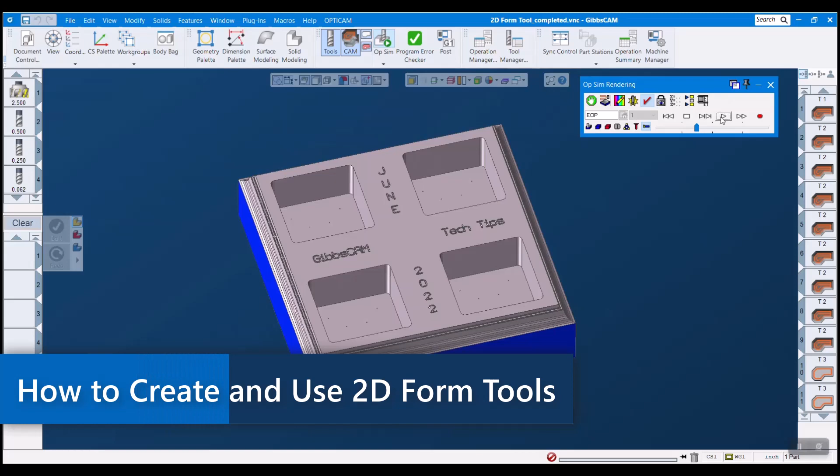Form tools are sometimes a necessary part of programming when you are using unconventional tools. Recent enhancements made to GibbsCAM make creating, using, and simulating these tools better than ever. Today, I'm going to show you how to import a DXF, make a 2D form tool from it, and use it in a contour operation.

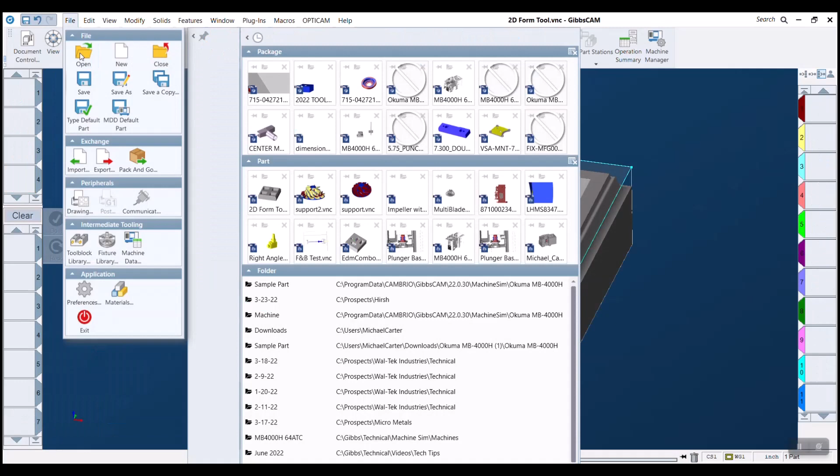So the first thing we want to do is go to File, Import. I want to select my DXF. DXFs are drawing file formats that only use two dimensions, X and Y. You can typically download these from the manufacturer's website for precisely this reason.

And so once I import this here, it actually comes in gray. And the reason for that is it's making a work group for our DXF layer. You can see that when I open my work group menu here, and when I select a DXF work group, it turns blue here, right?

So there are three rules that your tool geometry needs to follow for 2D form tool creation to work. The first rule is that it needs to be in the XY plane. I think when you import things from drawing files, they typically come in the XY plane, so this isn't too much of an issue. However, it is still necessary for this to work.

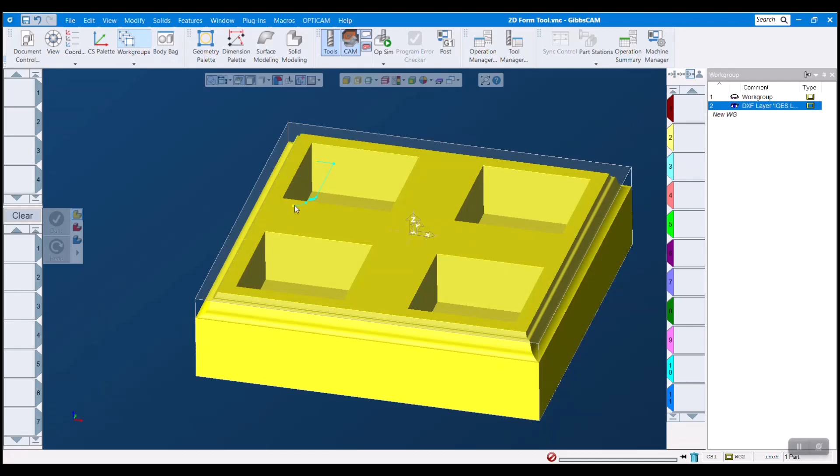The second rule is the tip of our tool here must be at 0, 0, 0 of our original coordinate system. So how we do that is we just double click this to chain select it, and we can go to Modify, Absolute Translate, and I'm going to click in here and I'm going to hold down Alt and Shift on my keyboard. So when I do that, it turns to a square, and what we're doing is we're grabbing values from the model to put into this dialog box.

So Alt and Shift on the tip of our tool, and it fills in the XYZ coordinates of our tool, right? And I want to move it to 0, 0, 0. So I hit do it, and we see that it jumps right over. So now I still have my geometry highlighted.

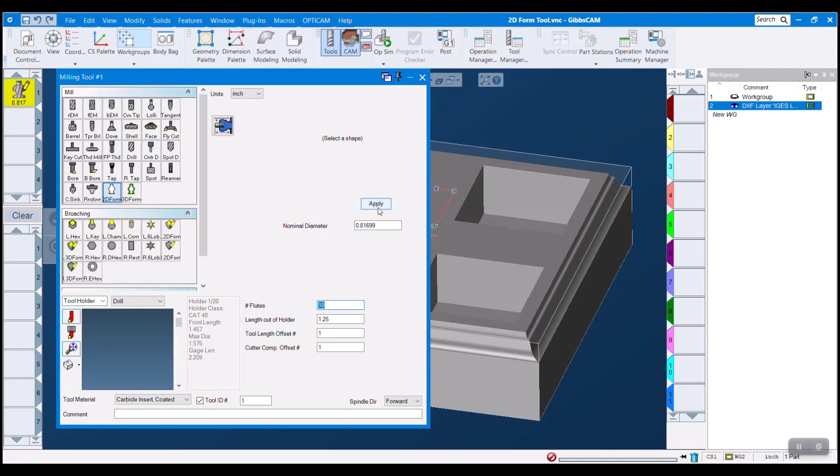We can double click on a blank tool tile, and 2D form tool is down here at the bottom. And then I want to come over here and hit apply, and you'll see it load in here, not only up here, but down here. We can select a holder. We can tell it how far out of the holder it is, all the things we can do with normal tools. So that's all standard behavior. So that's how we create our 2D form tool.

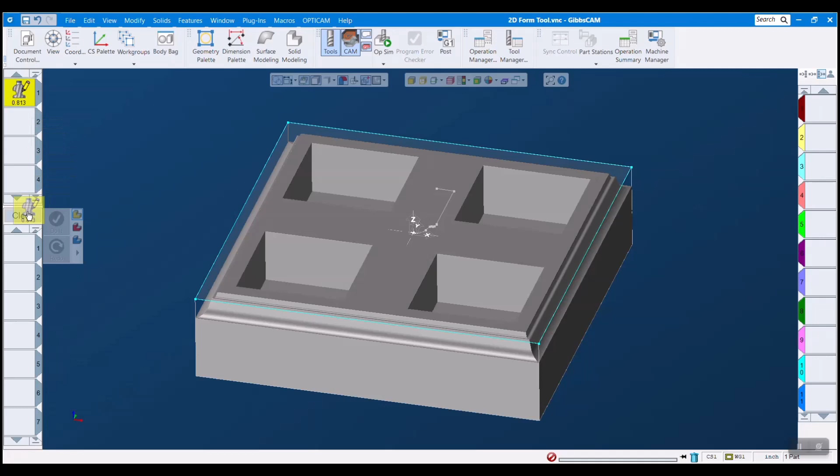Let's make a quick operation with it. So I'm going to jump off of that work group here back to our original work group and close out that menu. Let's drag this down and make a contour. And I'm not going to dwell too much on this. I just want you to see our tool in action.

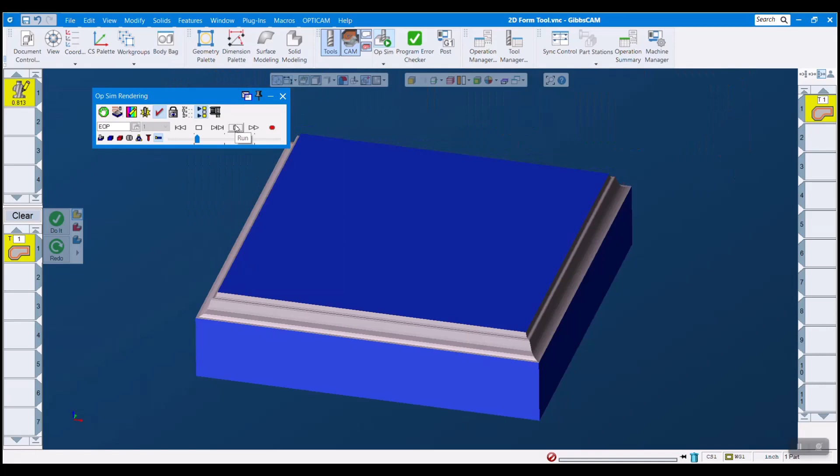Start off our part. So recent enhancements to simulation allow GibbsCAM to accurately simulate all kinds of form tools now, even in multitask machining and 5-axis machining environments. So that really takes our form tools up a notch here in terms of usability, viability.

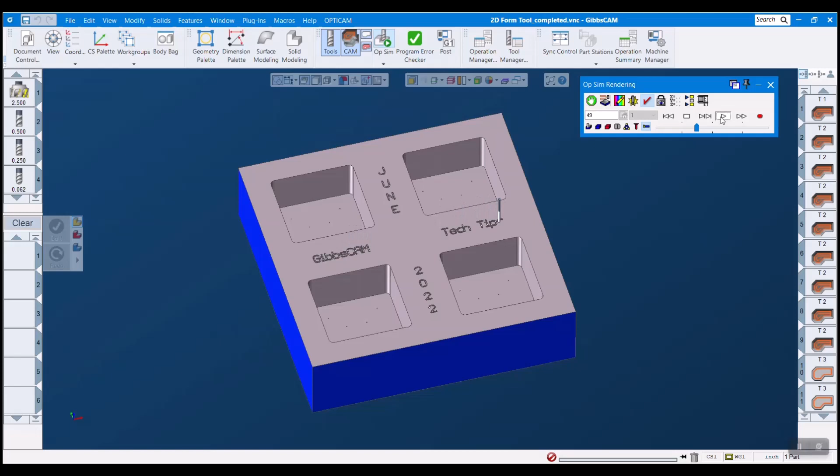2D form tools can sometimes be powerful allies when trying to machine difficult features. Now that simulation of these tools has been enhanced, using these is an integral part of many programmers' routines. I hope that this tech tip has helped you see that form tool creation can be quick and easy, and that it is not something that needs to be shied away from.